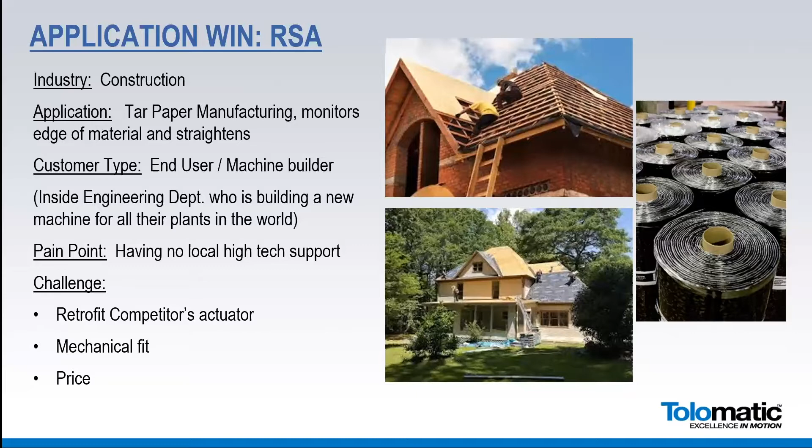They weren't getting any support from their local supplier at the moment. We were asked to retrofit a competitor's actuator, and in order to do that, we had to come up with a special mount for them, simply putting a couple extra holes in place. And then, of course, the price is last but not least, and we did a good job working with the customer and finding the right solution for the right price. Next slide, please, Andy. So what we ended up with was an RSA 32.

And the client was a new client for the distributor. Through teamwork with the client and customer and Tolomatic, we all got together, did the sizings, and created the right solution. And the reason they came our way more than anything was simply because of the technical support by the distributor. I can't emphasize that enough. The distributor went to work, was engaged, and the customer was engaged. The value proposition brought to the table far exceeded our competition. So great teamwork, great support through the distributor.

The RSA 32, we sold 25 actuators right out of the gate, which was somewhere around 50,000 or better dollars. And then more machines are expected to be coming in the end of 2020. Great job, great win.

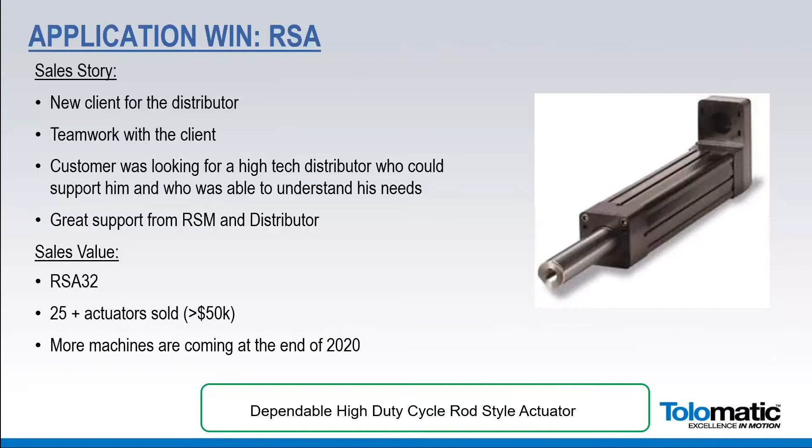Okay, so next one. This one's in wood processing, completely automated building construction. And that's what I mean, completely automated. The customer actually had a dream that he wanted to be able to take a semi-trailer with this machine loaded on the back, just simply pull into the area for construction and then remove the walls, load the machine, turn it on, and out pops a fully made wall, etc. So it was quite interesting.

It's kind of one of those applications that, you know, we all would like to have because it's why we're in business. So the pain point was there were a lot of different movements, a lot of things that had to happen through the process. And then everything had to be automated and controlled for timing, etc. The challenge was the customer had already been familiar with Exlar, had already started down that road, but hadn't gotten any product yet, had little experience with Tolomatic when the distributor stepped into the fray.

One of the main reasons that we got this was because of the broad offering of Tolomatic and the products that we had to offer. It was that the customer didn't have to go to, let's say, supplier A for this product and supplier B for this product. He was able to get the MXE version of our products as well as our RSA, GSA version of our products all at one distributor, which was very interesting to him.

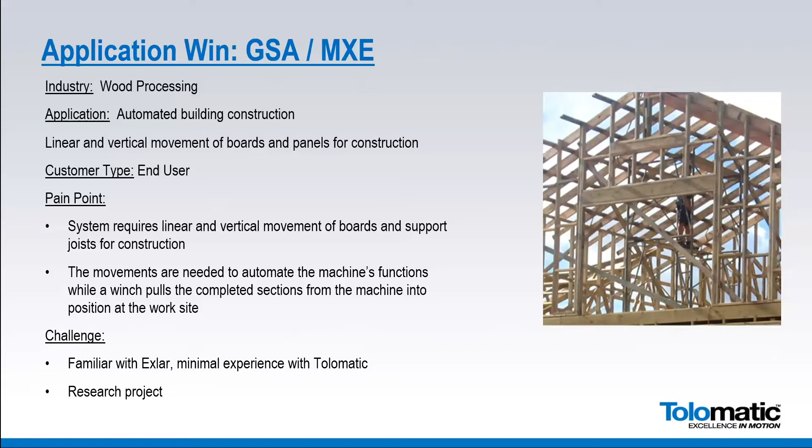So application win, the customer ended up with the GSA 32, an MXE 50, and an MXE 63 to do various actuations. The MXE 50 would raise the joists into place. The GSA 32 would push the plywood into place, and then as it held that into place, down from the top came automated screw guns, would screw the plywood into the joist, and then the MXEs would then take that full assembly, index it forward, whether it be 16 or 24 inches, and then they'd start the whole process over again.

The joist would index into place. The GSAs would then clamp again, and then the screws would come in. Now, the interesting thing about this was that the machine was set up so that they attached the wire to the initial part. And then as this started indexing the plywood through the system, it also pulled the wiring through the system so that when you were all done, you had a completely fully made wall with integral wiring. Otherwise you'd have to go in and re-drill holes and try to fish wire through, etc. And then they would take that completed wall and install it on the floor itself.

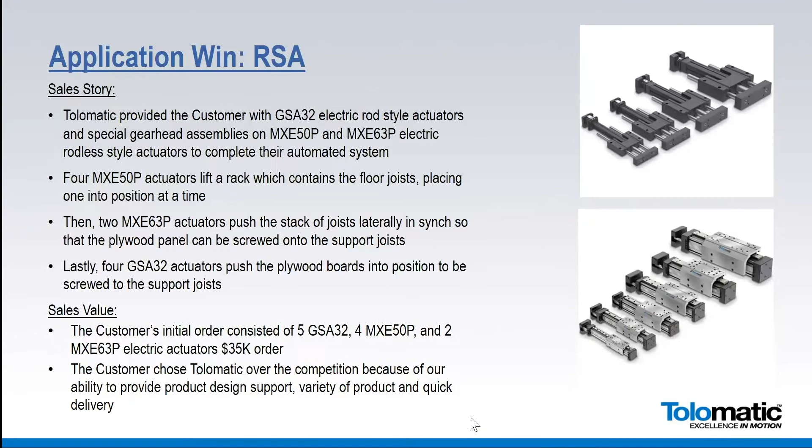This application is one that highlights the benefit of bringing your high volume prospects back to Tolomatic to work with our engineering team. I know we'll get back to normal eventually, but this is one that created a brand new series of actuator for Tolomatic. The application is window and frame machining, the aluminum frames for high-rise commercial buildings. It's a repeat part number OEM, and their pain point was actuators that they were able to purchase from known competition were having severe deflection problems in 3 axes.

So we brought the customer back to Tolomatic. They met with our engineering team. Our engineering group worked directly with their engineering group to create a product that didn't exist. It was a complete white sheet of paper application. And that's one of the benefits of Tolomatic, being as nimble as we are. If the application presents itself and it is truly an application where we're benefiting the customer, benefiting your distribution organization, this is a great way to endear yourself to the customer, bringing them back to Tolomatic.

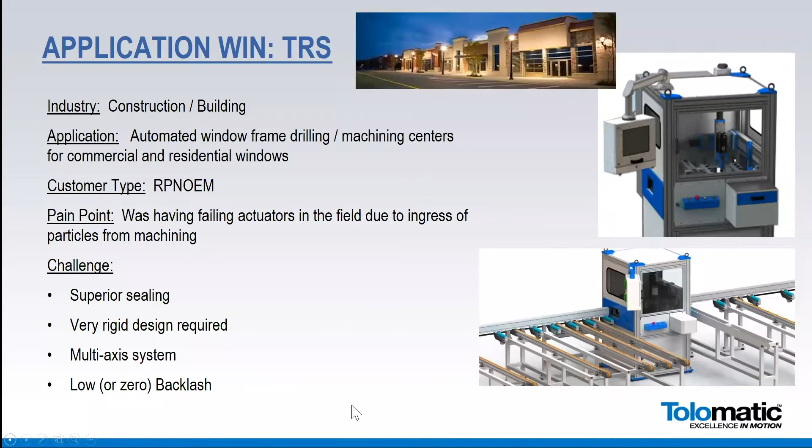So we created a product that had superior sealing capability because this is a machine tool application. We started with one of our standard products, but realized that we needed to do something that was completely out of the box. So our engineering team designed extrusions. We created tooling for the extrusions, engaged with the customer, and created exactly what they needed.

The sales value here, a little bit higher than the number down below, but it's been ongoing business now for several years, and we've really helped the customer through our partnership with our distributor partner to grow their business. So it truly was a collaboration between the 3 companies.

So the distributor, the end customer, and Tolomatic came together as a group, and we really provided something that helped the customer grow their business and become a major player in this field. So business is ongoing. We continue to develop this series of actuator called TRS. We're hoping that this will be a released product soon.

We have 4 sizes on this one. It's a 100 millimeter wide body, 130, 165, and 225 millimeter twin rail design that is just an amazing product. So stay tuned for that one.

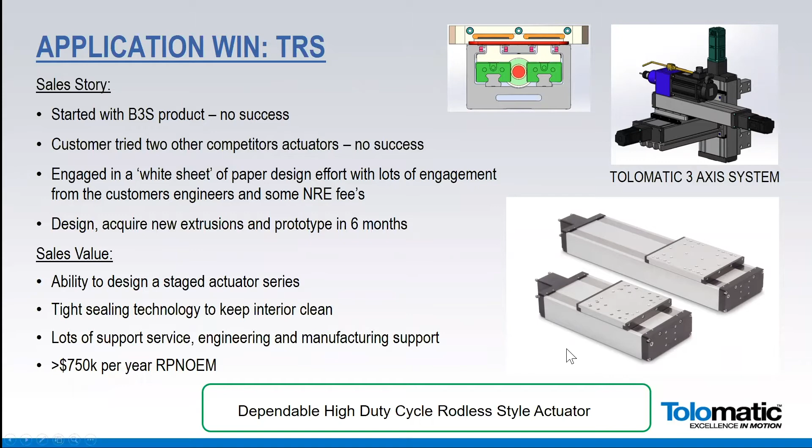Thanks, Andy. Thanks, everyone. Great. Thanks, Bob. Good win. Great win. Great customer. Great collaboration with our distributor there. We'll move on. And Rich Braga. This goes back a little ways, but shutter manufacturing. Yeah, thanks, Andy. Good morning.

This is a shutter manufacturer that was moving a drill head, and obviously you're drilling holes to a pattern so you can put shutters together so they look nice and pretty on the window here. A lot of the woodworking companies that are making products like this typically used air cylinders to move and index their fixtures back and forth.

So this end user really had to develop an automated manufacturing process to speed up the whole production of these shutters. So they needed to automate the drill head and accurately position it and space out the holes as they were drilling. The other requirement was obviously there's a lot of contamination in this operation, so they had a desire to keep the actuator as clean as possible. Next slide, please.

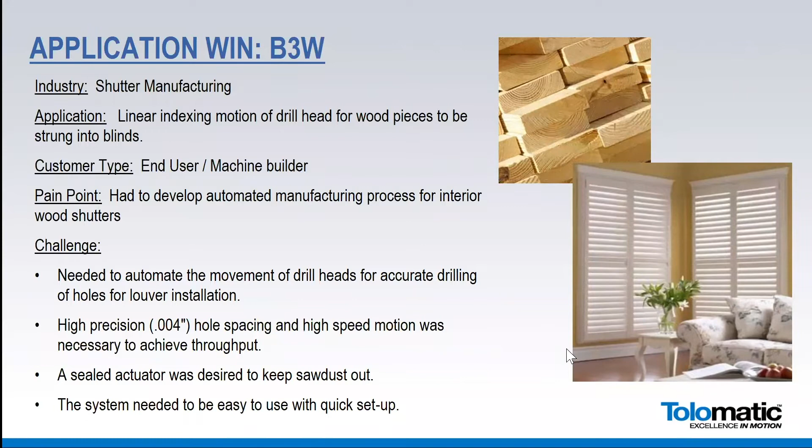So we settled on the B3W. It was a very long stroke, 204 inches, and it's indexing this drill head to these different positions as it's drilling. The B3W has a good sealing capability where you have a big wide band that covers the belt so nothing's exposed, which is very good.

And even on a lot of these applications where dust is prevalent, you can get an actuator from Tolomatic that has a purge port, and you can pressurize the inside of the extrusion like 3-4 psi. So this reduced their whole time and drill setup, improved all their accuracies, and gave them a real consistent win over an air cylinder.

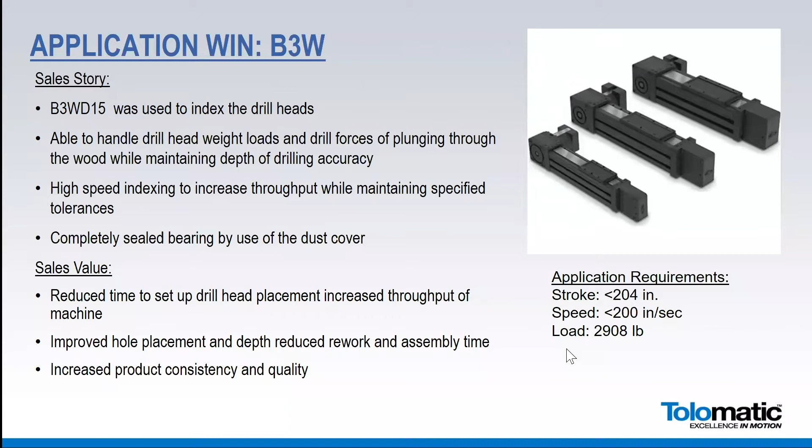Great. And not only did you help make shutters, you helped make furniture as well, right? Yeah, so a lot of these companies that are making furniture, kitchen cabinets, a lot of it's this press board manufacturing, things you could get at IKEA. They often move all their jigs in and out with disposable air cylinders, and lots of times they require more than two positions.

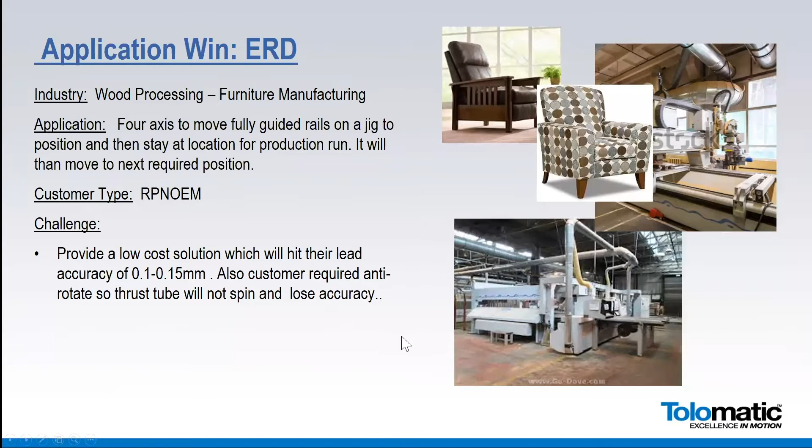So this was a very large manufacturer of kitchen cabinets in America, and they have one centralized engineering firm that looks at their processes in-house and how they can speed up and improve their assembly time making these cabinets. So they were looking for a lower cost solution because they're switching from an air cylinder to an electric cylinder for the first time. And they required some accuracy as they were moving the jig in and out and placing different size cabinets in. Next slide, please. So yeah, there we go.

So then our contact at our channel had a very good relationship with them. We had a solution with our ERD 15, where the motor was supplied by a distributor. So picture a jig where air cylinders are on it. You had 8 actuators per machine. And as they spread this win throughout their manufacturing facilities, it turned out to be a very nice win indeed. And the benefit was we flipped an air cylinder application to electric. We came up with a very viable solution based on cost and hit their repeatability requirements.

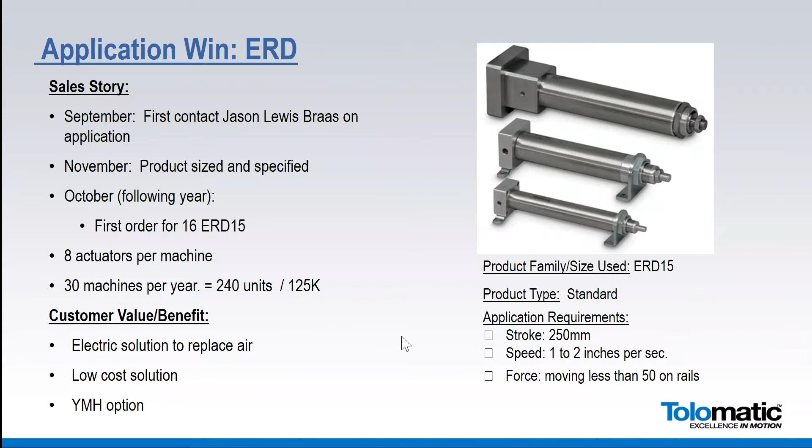Thanks, Andy. Hi, everyone. This is an OEM of ours that's been around for a long time. It's a window manufacturer, and they use our BCS actuators, and they have used our Unix in the past for fixturing, material handling, and they run ultrasonic welding on the frame assemblies. Again, this customer's been around for 20 plus years based on our relationship with the distributor. There's a real good relationship there with that account manager.

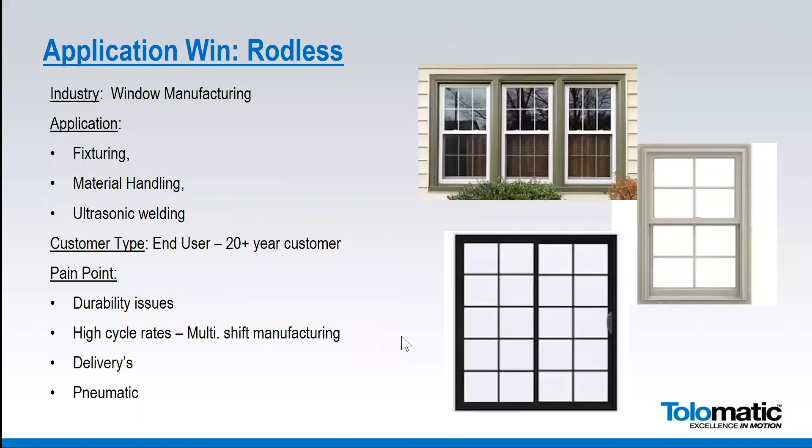Originally the pain point was durability issues, high cycle rates, because they run multiple shifts at the facility, deliveries, and originally this was a pneumatic solution, and we have started switching over all their stuff to electric recently. The next slide, Andy.

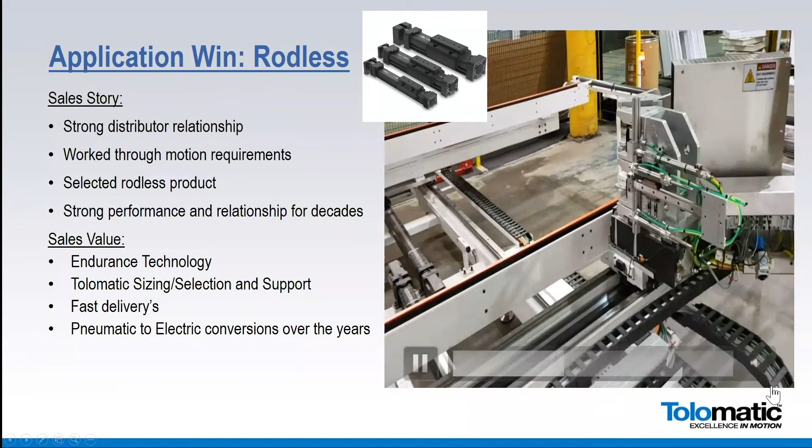So in this guy, you can see we use our BCS rodless actuator, and then this is guiding the assembly. The window would be in that frame, and it's carrying and moving; it would be a window, a door frame, a door slider frame, and that is an ultrasonic welder that's sitting on top of there. And there's one on either side, so each side would get welded and then index accordingly.

So there are different stroke lengths that this thing comes down based on the window parameters. Again, our relationship with the distributor and the customer, a long time. Again, strong performance. And again, the sales value for this whole thing was just the endurance technology. Again, these guys are really, it's a multi-shift, as I mentioned before.

Sizing selection, support from us is they're always in contact with myself and the distributor. Fast deliveries, and typically, just like what Richie said, a nice pneumatic to electric conversion win over the years based on all their applications. Thank you.

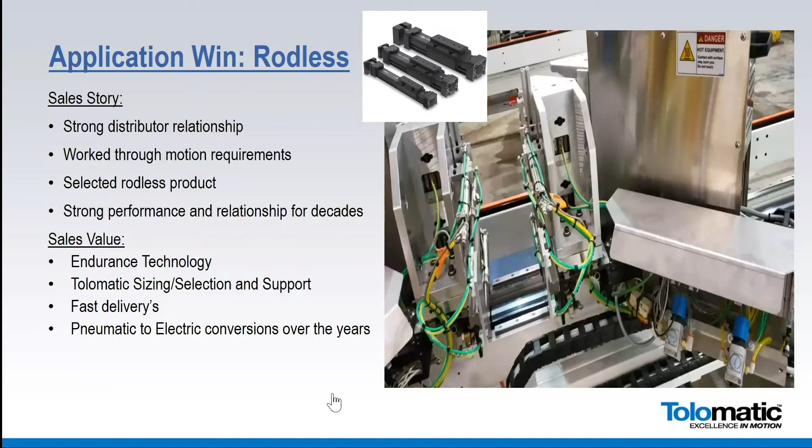But this was an application that was fairly unique, with an Amish woodworker in Kentucky. And what happened was that, as we've gotten more detailed in our homes and features and so forth, they were hand grooving and putting the texturizing into these wood planks that are going into the wood floor material, and it was very time consuming and not very ergonomically sound for the workers.

So they were looking to automate this process without losing the manual process with the look and feel and depth of the texture. And so we also needed to be very flexible to accommodate different board widths, very limited changeover time, and hardness of the material or the wood that they were using.

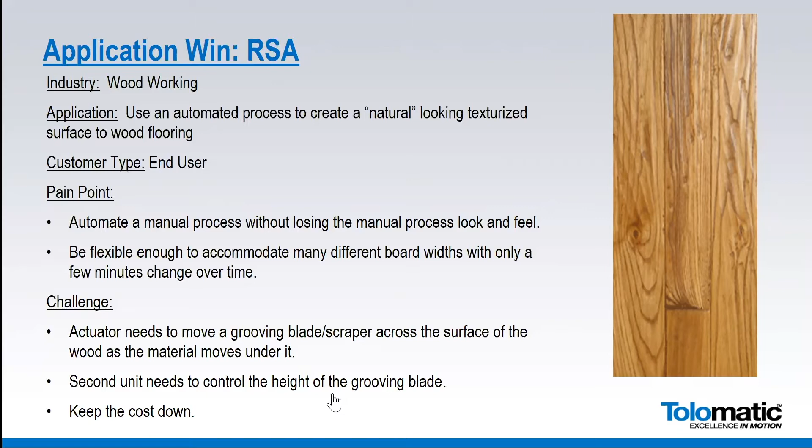So what this does is it moves a grooving blade or scraper across the surface of the wood as the material moves underneath it. And there's a Z-axis unit that controls the height of the grooving blade as well. And it needed to be pretty economical from a cost standpoint.

So we sold them some RSAs to do both axes of motion here, the Z and the X. And it was a cost-effective solution for them, and we were able to meet their objectives and their goals with the depth and maintaining that natural, or hand grooved, appearance to the end product.

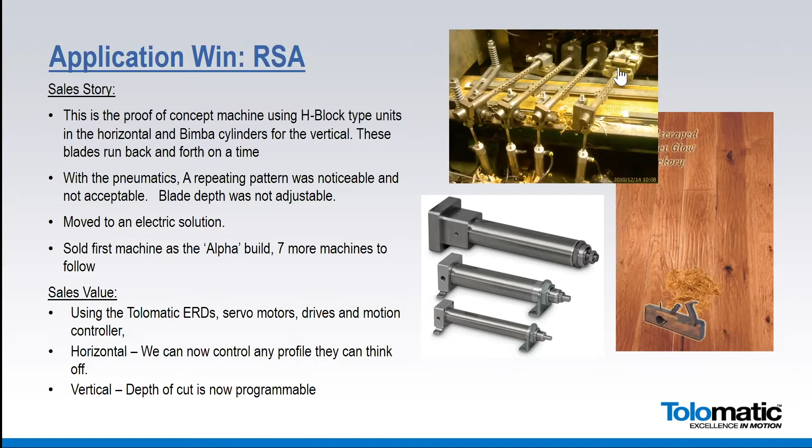Thanks, Andy. Yep, thanks, David. Appreciate it. So we've talked a lot about building and construction sort of applications. We're going to move over to lumber and woodworking. Brian Staines. Yeah.

This is a repeat part number OEM in the timber and wood processing. Moving and sorting boards for cutting the correct lengths of whiskey barrels. The OEM typically had been doing this pneumatically for years and years. They wanted more control and less waste. They were having a lot of waste, and they could increase their linear footage by going electric.

And two, this was a pneumatic/manual process, so there were some dangers involved. And to see the process, it was kind of shocking that they haven't had problems with workers being hurt, things of that nature. So they wanted to streamline the process to get more control, less waste.

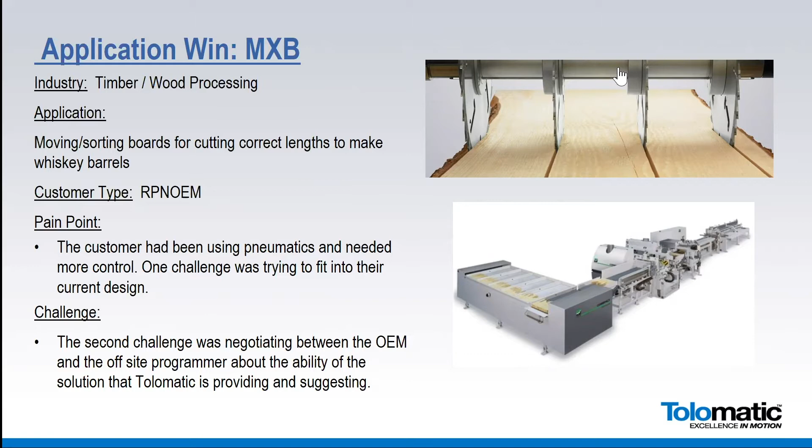And so we had another challenge as well. We had an off-site programmer in upstate New York that worked for the OEM. And to negotiate between him being in upstate New York and my OEM being in North Carolina provided somewhat of a challenge. But we finally got through some of that. So next slide, Andy.

So this kind of shows the sales history, and some of our projects take quite some time, especially if they're larger projects. So we started this initially in January with a distributor, made the first meeting, and then took a couple months negotiating back and forth, finally got our first quote in April. It was MXB 25P with profiled rail. It gave us the stability to put their tooling on our actuator and to support it. It was a 30-inch stroke, 15 inches a second with an 80-pound load.

Met again in July. After many meetings with the OEM, we were finally able to get the design to fit into the OEM's machine. They had to make a few adjustments on their design. And then in November, we got the first prototype order. And then, you see in February, we got the full order. So that just goes to show us, a little over a year process, but it was well worth it.

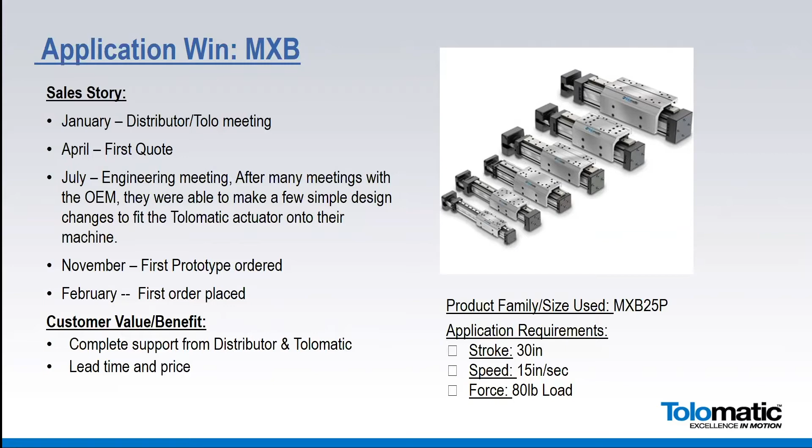Had complete total support from distribution and Tolomatic, and lead times and prices were obviously a big factor as well. But overall, it was a good win, a little over 50K, and still ongoing as well. Next slide. Great, thanks, Brian.

So this is another repeat part number OEM in the timber and wood, but this is moving a saw blade. These applications are all over. There's many more to be won, but this company was using hydraulics. As you know, a lumber mill is a very rigorous and nasty environment. So they had hydraulic fluid leaking everywhere and contaminating the wood. EPA was really all over them. So from government regulations and all, they were really having a hard time with the hydraulics.

Very dusty environment, wet environment, as you well know. And also, with the hydraulics, they had temperature fluctuations. So they would have premature seal wear, reduced performance, and cold startup from the hydraulics. So we were tasked with trying to put an electric actuator on this. And so we came up with the RSA. Next slide, please.

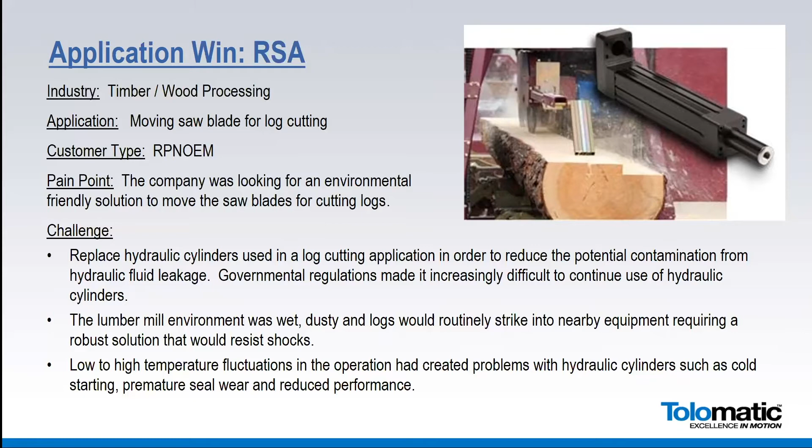So RSA 64, we put a ball screw in it with an IP67 rating. So that would keep the contaminants out of the actuator. And there's always water splashing and things of that nature in this environment, so it needed the IP67 rating. The 64 has a 42-inch stroke, 42 inches a second with a 1,000-pound load. It's a very big, robust actuator, and was able to take the rigors of being in a sawmill environment.

The good thing is with our Your Motor Here program, the customer was able to spec their own motor, and we were able to make the motor mount for them to accommodate their motor to controls. The sales value here: we eliminated the major concern, which was the hydraulics from contaminants, and it's also a fire hazard in the lumber mill industry.

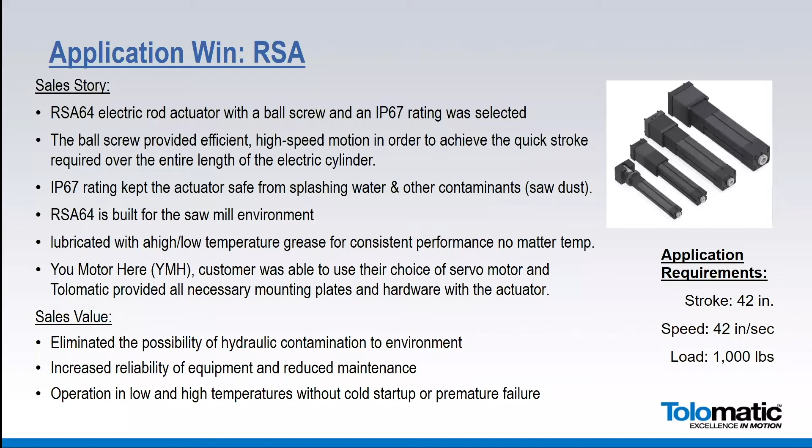So we were able to eliminate the hydraulic actuator, and then we increased the reliability and the performance, reduced the maintenance, and we put low temp, high temp grease in these things, so they were able to operate efficiently in the sawmill environment, no matter what the temperature. So overall, very good win, and there's many more of these applications in the lumber industry to be won as well. Thanks. Great, thanks, Brian.

We'll hand it back over to Mr. Schmidt. Dave Schmidt, we got a couple here on a wood cutting application.

Yeah, thanks, Andy. Apologize for background noise here. I got a student printing out a book on my printer.

So anyway, this was an application, also piggybacking off of the application that Brian Staines just talked about. This is in the whiskey barrel or wine barrel manufacturing, utilizing our RSAs and aligning that log to go into a horizontal saw. So in that embedded video that you just saw on the right-hand side was a pair of RSA 50s that raise that log to align it into what they call the heart.

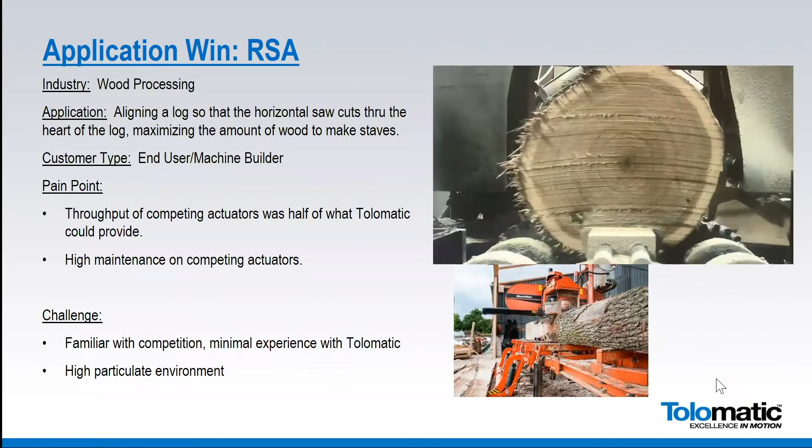So that's kind of the dark center bullseye that you see there on the log, and make sure that they get the most accurate cut across the board so that they can make the most staves out of this for the barrels. So this is, as you can see, a high particulate environment.

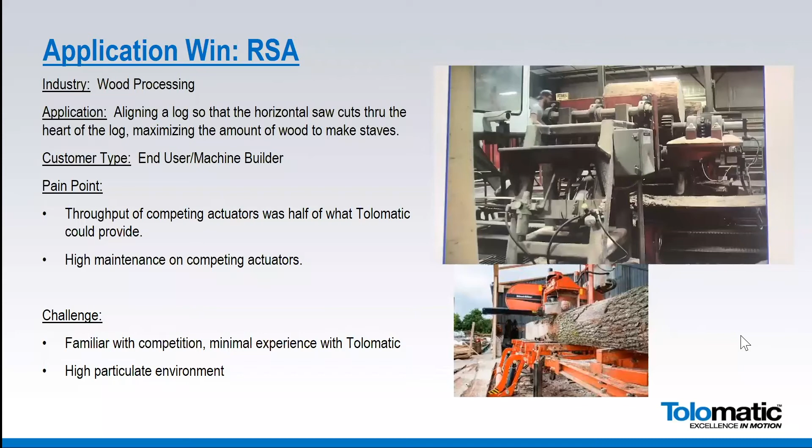This particular customer was familiar with our competition and not quite so familiar with Tolomatic, but compared with what they were using previously, we increased their throughput by quite a bit, and they were having a lot of maintenance on the competing actuators. So next slide.

And due to our partnership with them, and I think Bob Chunko also talked about how critical and key these partnerships can be, we were installed on other applications, and we're being designed in on new machine builds at multiple plants. And we're seeing annualized business with this particular customer of over $100,000 annually. So next slide.

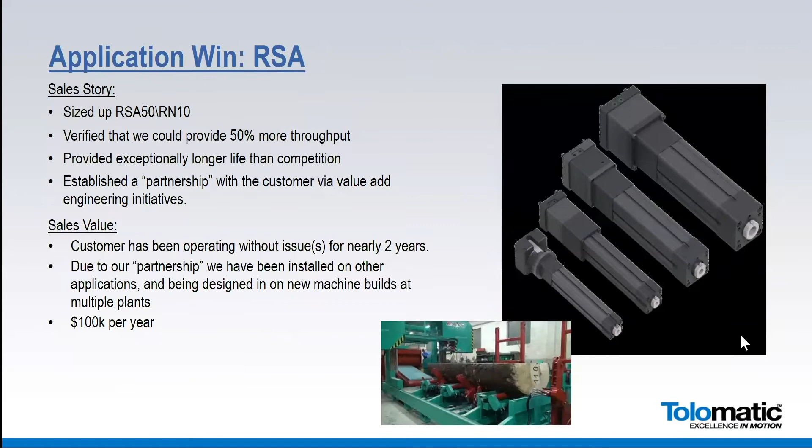This continues on with the same customer, but a different application. This photo is kind of what we're being designed in on with the RSA actuator. But what I'm talking about here is providing the tapered pitch to the staves as they're being cut. And Andy, if you click on that YouTube link there, I'm going to make everyone kind of thirsty here with a short video of how the barrels are made from stage 1 throughout.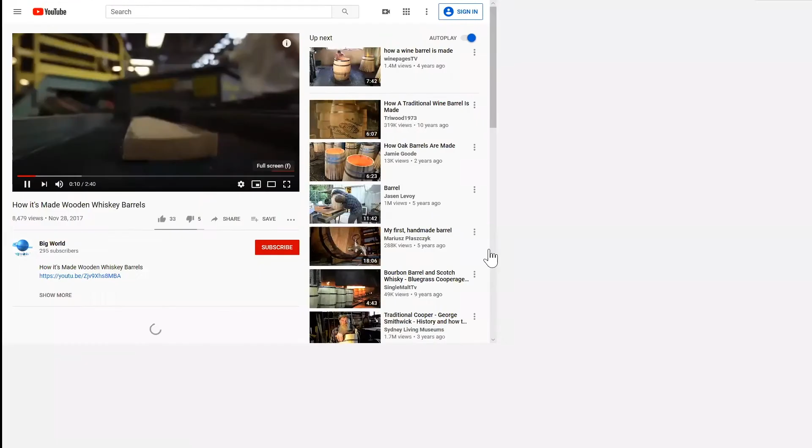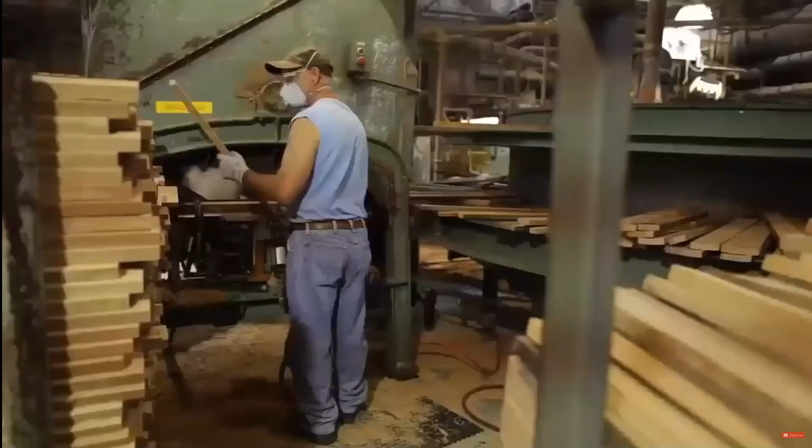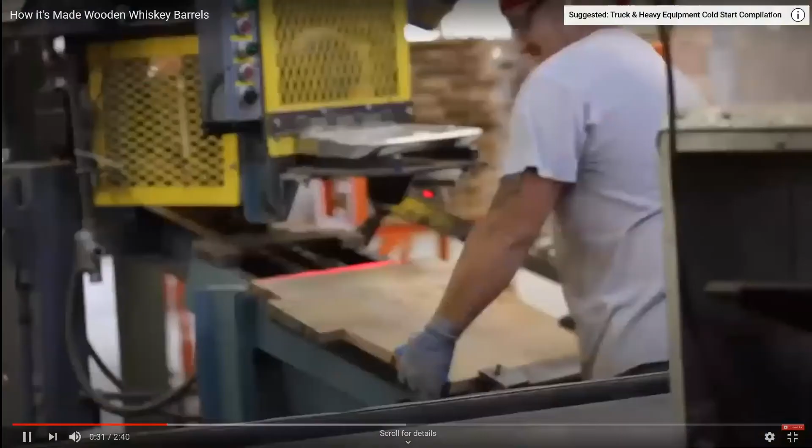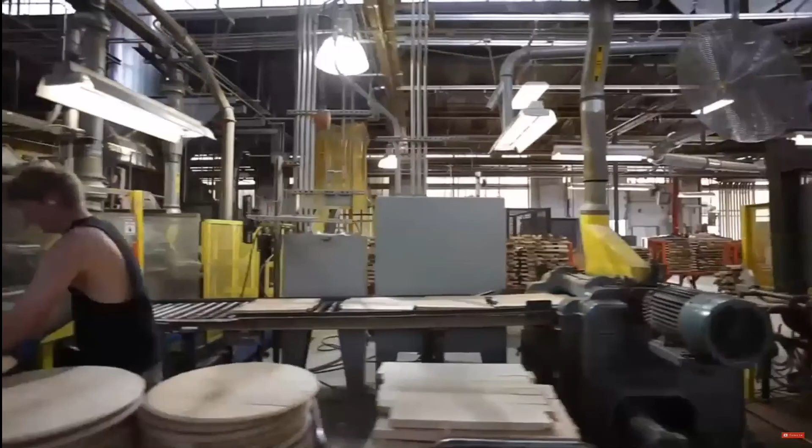So as you can see, there's a lot of manual processes here and a lot of stuff that has been historically done hydraulically, and we can modify this with electric actuators and minimize their risk to damaged product as it goes from stage to stage of the barrel manufacturing process.

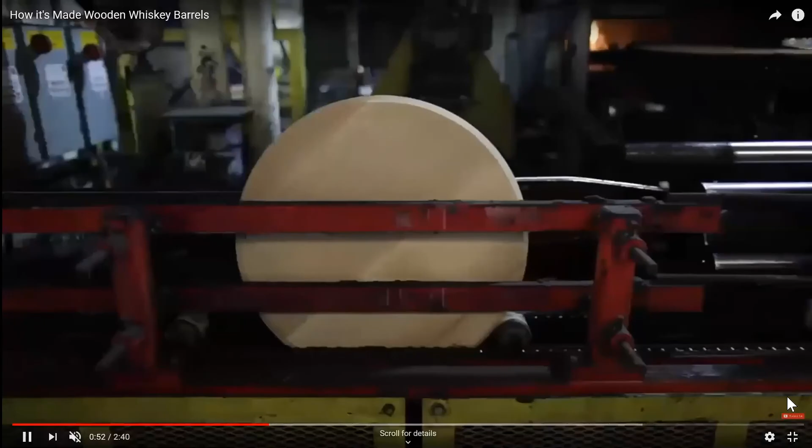So again, it's a high particulate environment, and due to our endurance technology, this enabled the RSA series to be positioned and move a lot of those grinders and saws and so forth. And I can't emphasize enough how successful we are when we establish a true partnership with either an end user or a special machine builder.

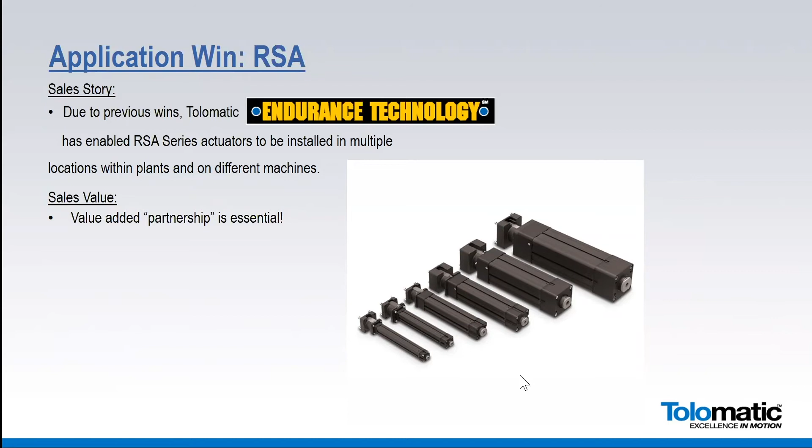So thanks. Perfect. Thanks, David. We're going to go back to Keith Hogan. Thanks, Andy. So this win in the... you hear that? Yeah, you're right. I don't know if it's my computer or yours.

Anyway, so it's in the timber wood processing, fence positioning. And if any of you are familiar with timber processing, basically it's all about optimization. They've got to get the most out of each log that comes in. So they'll cut the log, slice it into boards. Then all these boards are put on a chain conveyor that has lugs on it.

And so the faster you can run that conveyor, they go by lugs per minute, the more product that they put through, the more money they make. So it's all about optimization. So the boards go through the scanner, and the scanner basically optimizes the board to get the most out of it. And then the next thing it does is it goes into the saws, or it goes past the fence rather.

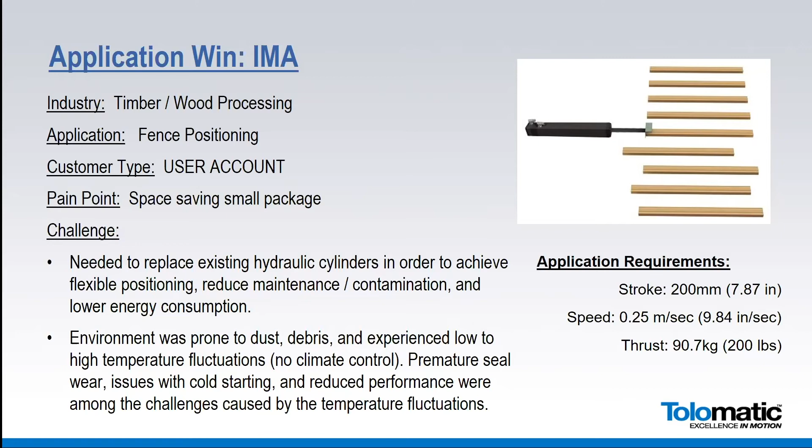So what we ended up doing was sizing it up for an IMA 33. They basically had limited space because they had a hydraulic cylinder in there. So the IMA was the right size to fit in there with a 5mm ball screw. With the IP67 option, they were able to take care of the contamination in the environment. This application was brought to us by a distributor, and the distributor works very well with the mills. They did the sizing for them, so our sizing software was key in all that.

The sales value: we were able to increase their throughput, have the positioning that they needed, and virtually trouble-free, no leaks, if you will. The actuator doesn't care whether it's cool or hot. Obviously, it has its limitations too, but compared to hydraulics, it was easily used in the application. So again, excellent win. Typically, you'll see more than one of these in a row, and a good spreadable win in that industry.

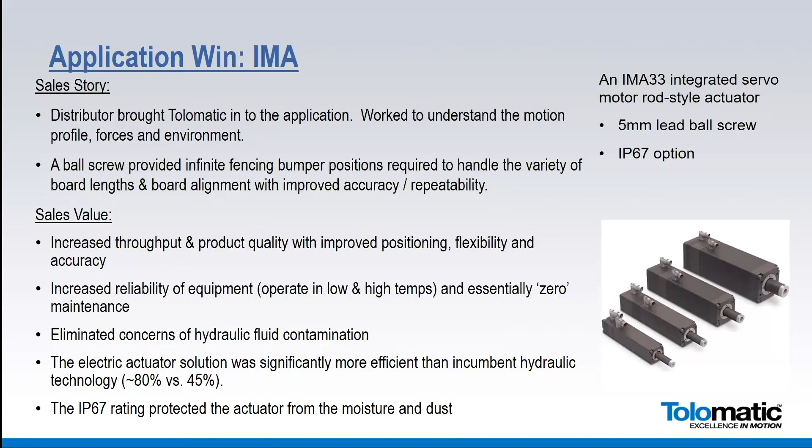Next one is also a fence positioning, but this is a repeat part number OEM. The pain point was the current solution was hydraulic. They were one of the ones that came a little bit later to the table with regard to switching to electric. They saw the change was necessary because of competition doing that, and they were real keen on customization. The challenge was the technology change from hydraulic to electric was substantial. They needed somebody that was going to be able to hold their hand.

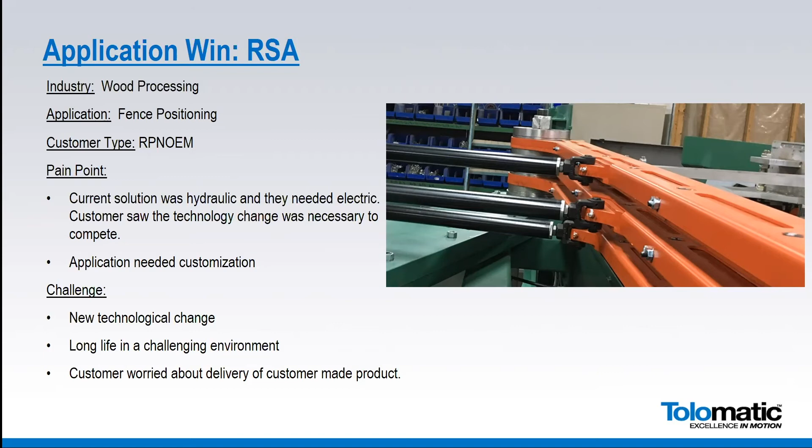They would need somebody that knew how to program, and so that's what the distributor brought to the table. Of course, long life is always a desire, and delivery is also key so that they don't have to have products sitting on the shelf for a long time. So Andy, next page. On this application, what we ended up going for was an RSA 32 with a 2 per inch ball nut. It required a special mounting, so we were able to accommodate that.

Initially, the lead came in from the timber show, passed on, and the distributor did a great job. Together with Tolomatic, went and did an easy presentation, kept it simple, showed them how the Sizeit tool was able to size this properly for them. Delivery was met. IP67 took care of the environment. It's just an overall good win and excellent repeatable business.

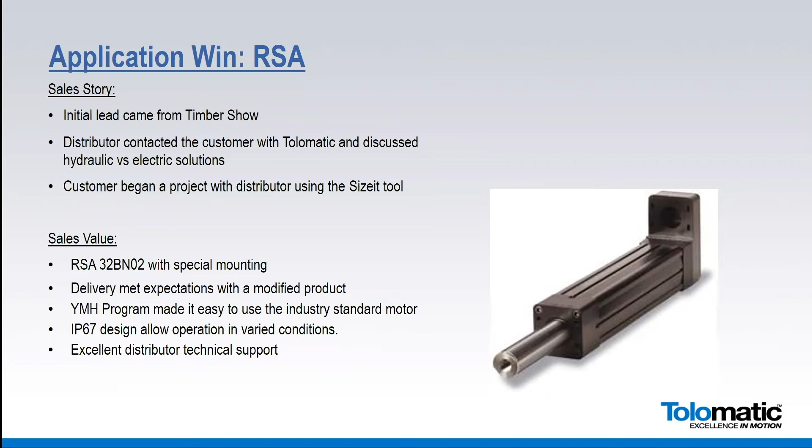Thank you very much, Keith. Appreciate it. We've got 4 more applications left as we head towards the finish line here. So Bob Chunko. Morning, everyone.

Thanks again. This is another hydraulic to electric conversion. It really highlights the Tolomatic endurance technology. This is an extremely harsh environment, wood mill application, planer application, and we're doing the roll tensioning on a planer in this application. True repeat part number OEM, and there were several pain points. The key being the setup of the hydraulic system, the commissioning of the machine.

Once it's on site, it's so much quicker to market for this customer with the electric systems rather than the hydraulic. So we eliminated the possibility of hydraulic leaks. Like I said, quicker assembly of the equipment. Just a great application showing the endurance technology.

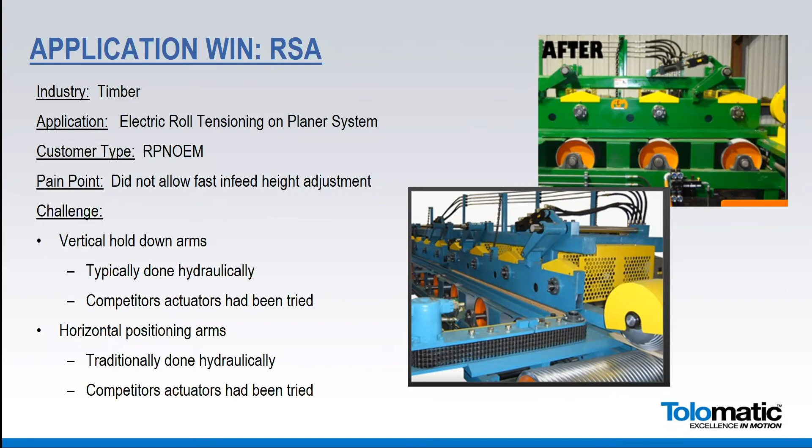Competitors' actuators had been tried. Tolomatic was proved to be the better option here, better endurance, better reliability, better delivery times, just an exceptional application proving where Tolomatic electric solutions can effectively replace hydraulics and be a real benefit to the end customer. The next slide.

So the customer started as a small independent and worked with Tolomatic on our RSA 64 size actuators. We incorporated roller nuts and bronze nuts into the application. The bronze nuts were used for their anti-backdriving properties, and it eliminated the necessity of putting a brake in the system. Extremely rough environment with a lot of shock, a lot of vibration.

Tolomatic product, working with the customer, we did some slight modifications. Their engineering team worked with our engineering team with the distributor partner. So it was another great collaboration to help a customer increase their business and increase the reliability and functionality of the machine. So lots of engagement in the engineering area. We improved our design based on this customer's input. We've had great success in the field.

Business continues to grow, and it's just another hydraulic to electric conversion. So not only in the timber industry, but think of other industries where you can replace hydraulic, because that's a true growth driver for your company. And Tolomatic does have the solutions for hydraulic conversion. So it's just a great win, and there are not that many players in this arena.

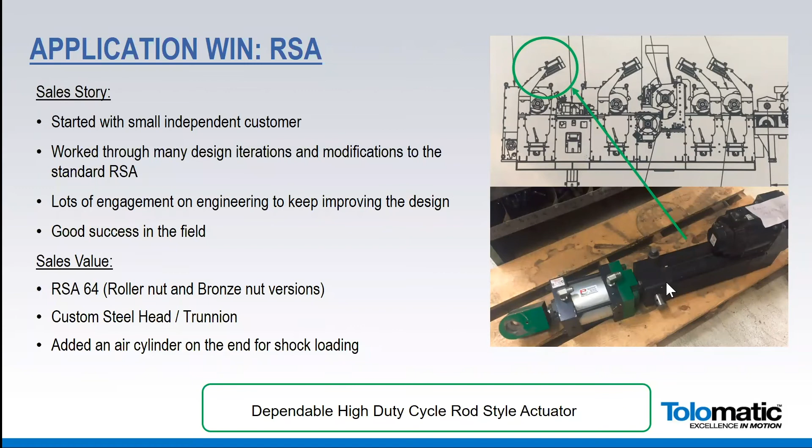Yeah, thanks, Andy. This is a small OEM machine builder. He does specialty wood products. This one's a router head product. It's a 3-axis system. It's CNC based. As you can tell, he's cutting stair tread, and seeing the picture on the top, it has an HMI. So it's different products. They cut at different angles on the steps, depending on what the steps and tread lengths are.

They originally started with a competitor product, which was actually obsoleted. And that product had a lot of backlash. That was always an issue with the product. So they had accuracy and repeatability issues. Durability was a big thing for the customer. And that obsoleted unit was a long lead time item, and he appreciates the standard product from Tolomatic that we give him today. Next slide.

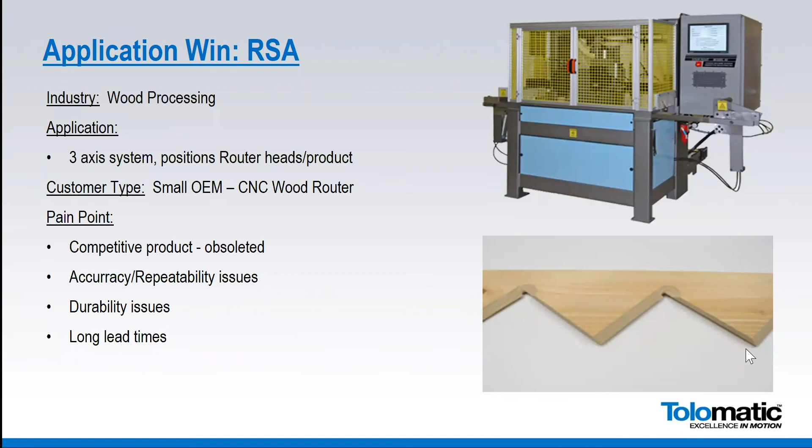So we started using these RSA 24s back in 2018. This machine has since been redesigned. So we had a prototype back in 2019, and then we've started to see the production orders coming this year, beginning of the year. A lot of the sales value went in from the distributor side, sizing, selection.

From that standpoint, again, endurance technology was a big thing for the customer, and that consistent repeatability of the cuts was the big thing. And then us supplying the low backlash ball screw was a huge advantage on this machine. Long life, and then some of the integration work was done by the guys at Solve with the distributor to put this whole package together. They'll probably be doing anywhere from 10 to 20 of these machines a year. Thanks, Andy.

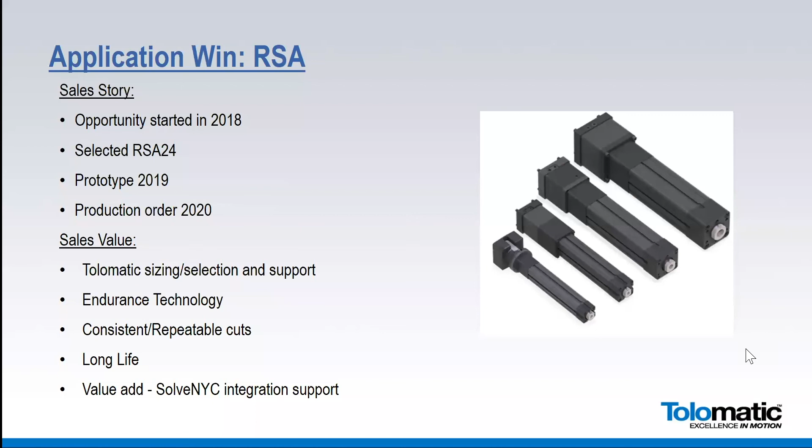Great. Thanks, everybody. Hey, one of the more interesting applications here, or unique perhaps, Rich Braga. You talk about the Pac-Man tree here. Yeah, so everybody wants to save their tree, and because they have to get pruned like you see in... the power companies don't like trees because they grow into the power lines.

Hey guys, it seems like we're having some technical difficulties with Rich's presentation here. Rich, you're cutting in and out a little bit, so... Okay, I wasn't sure if it was just me or not, but it probably could be me. I'll try to do my best here for a second.

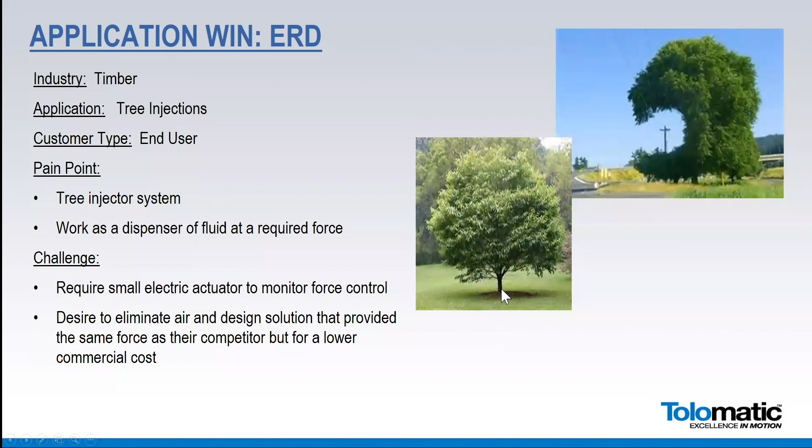So they required a small electric actuator to do this. It's basically volumetric dispensing, right? A certain amount of fluid needs to be dispensed at a certain pressure and at a certain rate. They had been doing some of that with air, but as you're running around out in the wilderness, having a battery or a DC power source is a little bit easier than carrying a compressor around with you and trying to figure out how to get that air distributed.

So we worked with the local distributor and won the contract for that job. They were able to hit their goal and the price point to commercialize it. They had a relatively low cost and fairly portable solution. So they standardized on our ERD 15 with a ball nut, and we sold 100 of them in the first go with this particular customer.

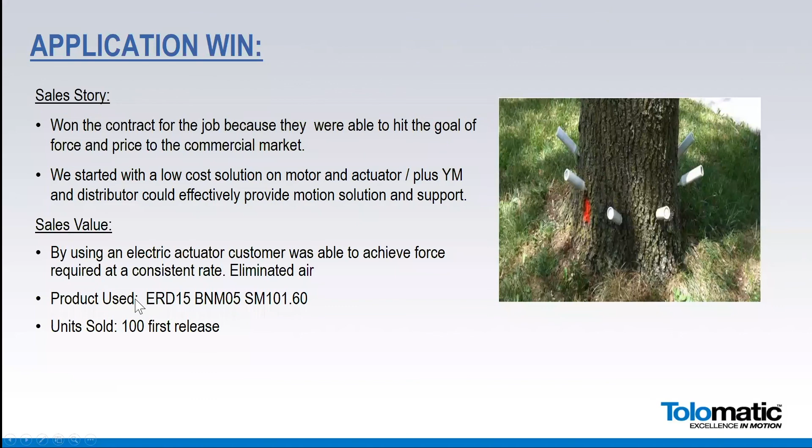And then we're going to finish up with one last application here. Brian Staines talking about a pulp and paper application. Yeah, thanks, Andy. Repeat part number OEM in the pulp and paper industry. This was a complete custom unit. It shows our ability to do customizations, which is really why I wanted to show you this. If you know anything about the pulp and paper industry, they have a wet side and a dry side. This is on the wet side of the process, the dewatering process. Very nasty environment on the wet side of the paper mill.

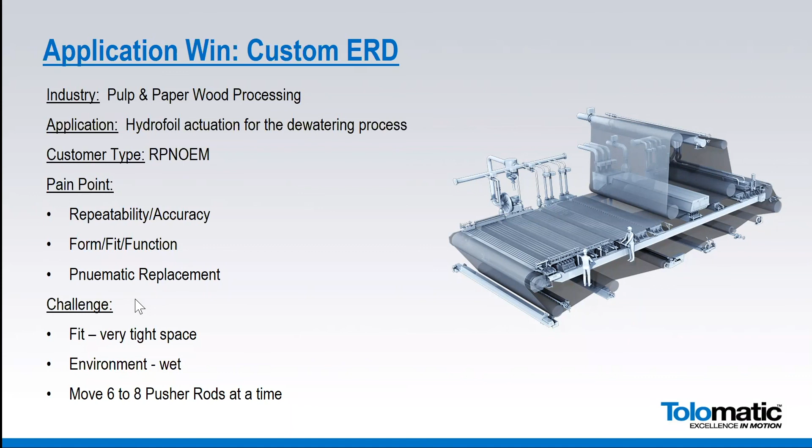These guys were doing it pneumatically, having repeatability and accuracy issues, and had a very specific fit for their actuators. So it was a very tight fit for us. Form, fit, and function, pneumatic replacement, had to fit into a very tight space. We had to move 6 to 8 pusher rods at a time, all in sync together. Next slide.

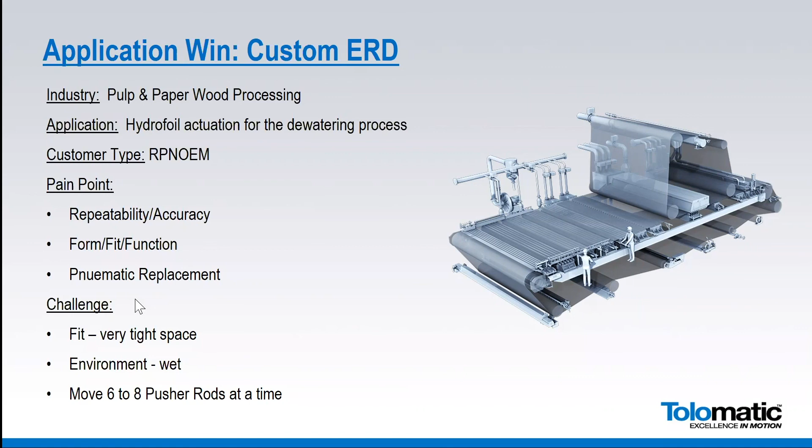And in the back, we modified the rear end of our ERD to accommodate a stainless steel motor housing, so you could put his motor, which was a stepper motor, inside the stainless steel housing. It's similar to our SS2 option, but it was a complete customization on the rear end and the front nose piece as well. So overall, it's a good win. We're still in the process of this as well.

In the paper mill industry, there's endless opportunities. We also do things, if you're familiar with it, like moving the paper rolls up and down from tier 1 to tier 2 with our RSA product as well. So there's many opportunities in the pulp and paper industry. Very nasty environment. We have the endurance technology and the rigorous actuators to accommodate. So anyway, just a good application overall.